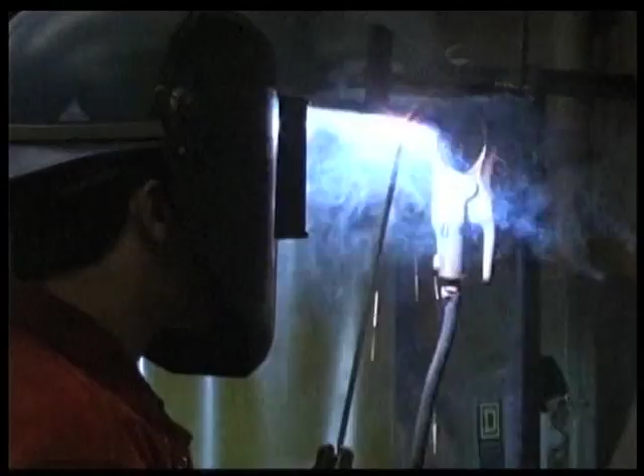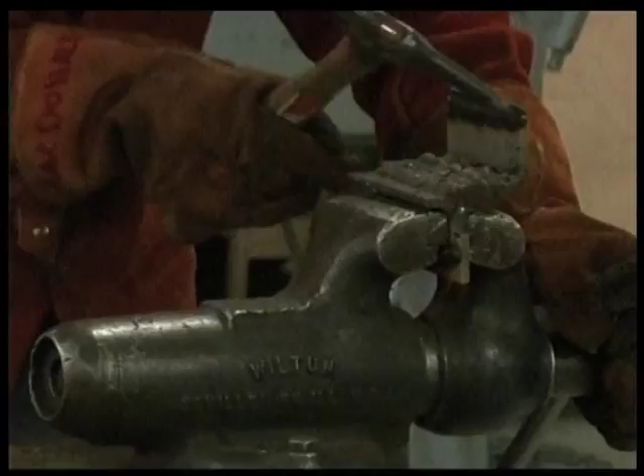Kevin Bell has been teaching industrial education for the past 22 years, but it wasn't until recently that he became a certified welder at NMU, allowing him to teach a vocational education class in the same discipline. Negaunee has always had a really good industrial arts program, and the tradition that we've had here, we're trying to keep that going. Bell is a Negaunee grad himself and was inspired by his predecessor's ability to immerse students in the topic by handing over the reins, something he strives to emulate in every lesson plan.

Not very often will I lecture very long. It's more hands-on, where they go from the classroom into the lab setting and actually do what we've talked about. This rod's called 6011, and the 60 in it holds 60,000 pounds per square inch.

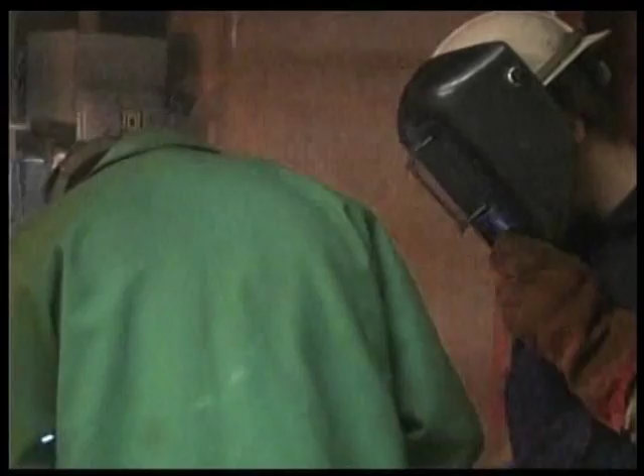Students end up doing a lot, which keeps them hungry for more. Being able to do something with your hands and being able to work with different tools, and not just having to read out of a book and take notes, it's nice to be able to do different things like that. Like working in conjunction with the school's leadership program to visit jobs in the real world.

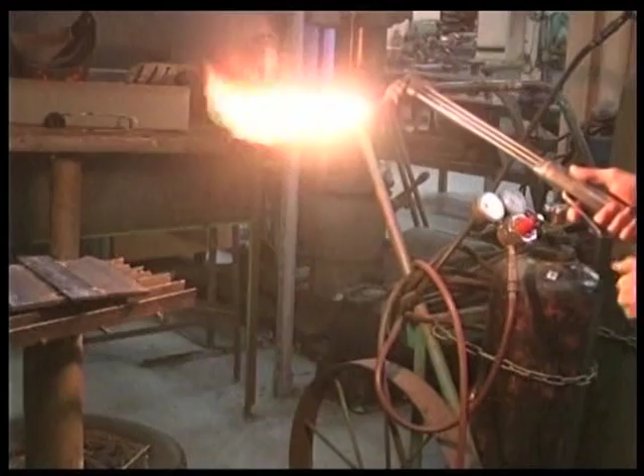People are telling us what they do on a daily basis and what interests people have in the community, and how we can continue to help people in different ways.

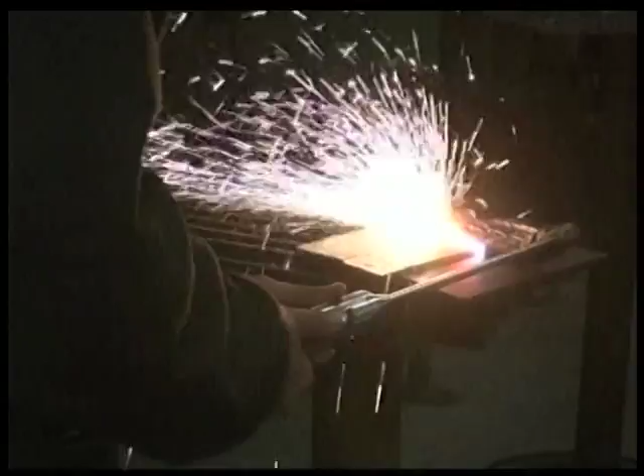One venture that incorporated their welding ability was the Grind Rail project for this past winter's downtown rail jam. They gave us the metal for it, and we designed the angles and cut the angles and welded it together, and it was nice to see that our work paid off and helped other people to have a fun time.

The welding program fosters those types of creative yet practical endeavors. We promote that. Like if a kid has something on his truck, like a bumper or something that he wants to get repaired, those are the hands-on things that will let them do that.

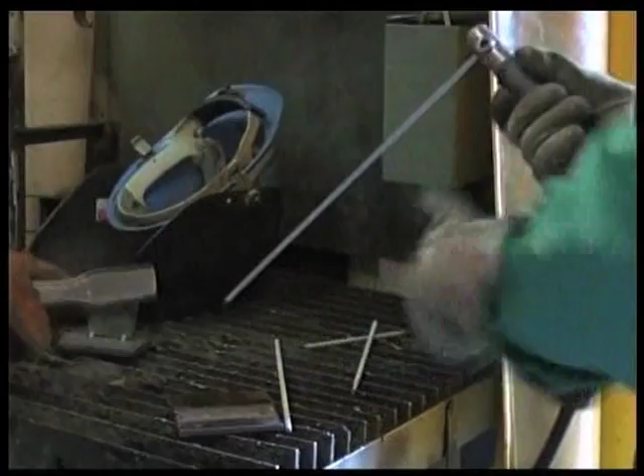Those little lines in there that make it look like you have a row of dimes, yeah, that's what you want. In between those proactive projects, Bell implements welding coupons that hone students' ability to bring designs to life through a guided lesson plan.

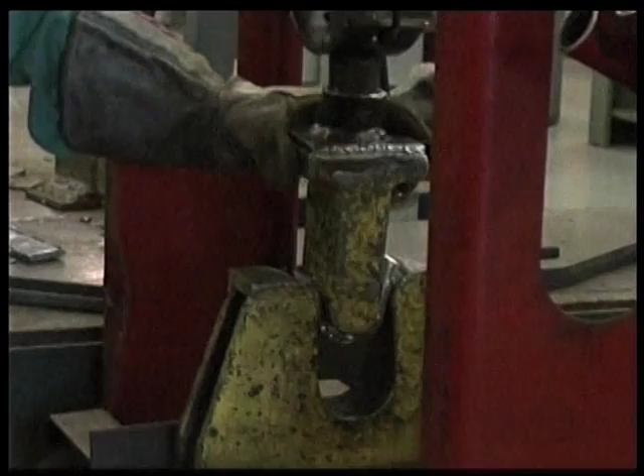He'll give us a sheet of a drawing to make, and we go ahead on our computer-aided drafting program, and we draw it up, and then we can take the part down here and make it in the metal shop, and then you actually have a part in hand. So it's pretty cool to see it actually all come together.

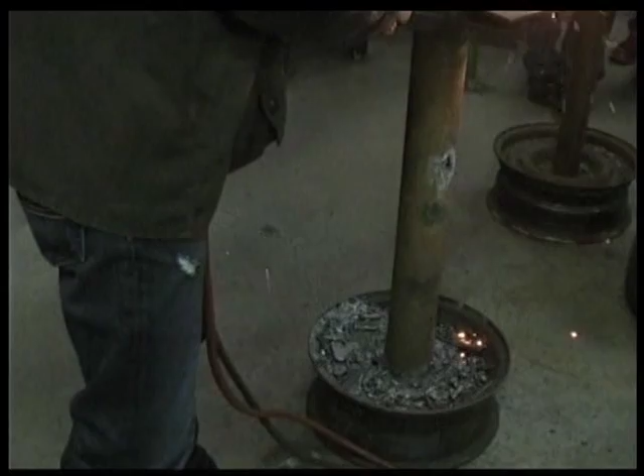There's a few that really that's their career. They want to be welders, but a lot of them will use it as a tool to get into something else. Most importantly, it gives students the chance to see the connection between the classroom and the work they've poured themselves into.

When you're working in a book, you get an A on your paper or a sticker on your paper. It's nice to be able to use something that you've made and see that people appreciate what you've made. That appreciation goes far beyond the classroom.

In part 2 of our look at vocational education, we'll explore the CAD program and how it's garnered Negaunee national attention. Reporting for ABC 10 and CW5, I'm Rick Tarsitano.

On a financial note that really hits close to home, as the nation's student loan debt climbs higher and closer to the $1 trillion mark, parents are beginning to wonder what the true value of a college diploma is worth. ABC 10's Rick Tarsitano delves into that issue with a look at a vocational education program right here in the UP that is starting to turn some heads.

Yeah, that one's going to go on the edge.

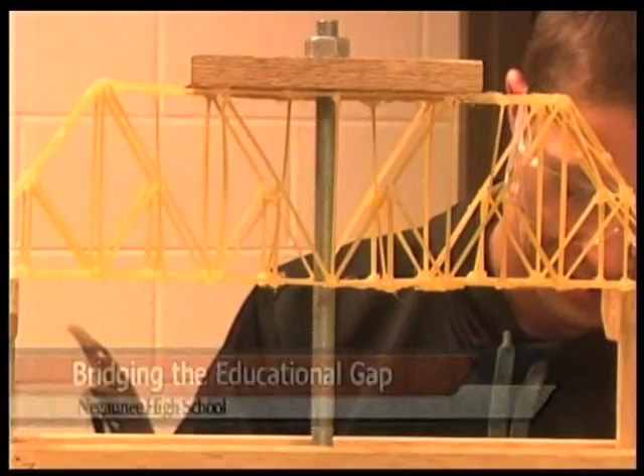While it may have looked like something you'd make in art class, this spaghetti bridge held more than 70 times its weight - that's just over 7 pounds. I know, that's pretty good.

The computer-aided design, or CAD program, houses 60 students ranging from freshmen to seniors, most of which are vying for their vocational education certification. They start out with the basics, learning board drafting and navigating the CAD system.

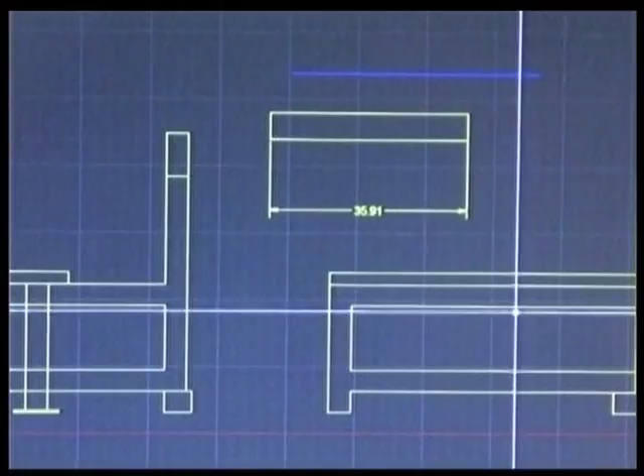The motor, and then there's a motor holder. Sophomore year, we get to do battle bots. That was one of the coolest things ever. That's when we start with Inventor, which is a lot more 3D modeling and working with mechanical parts.

And they're beyond proficient in that platform. It took one student mere minutes to design my camera with nothing to go off of except the naked eye.

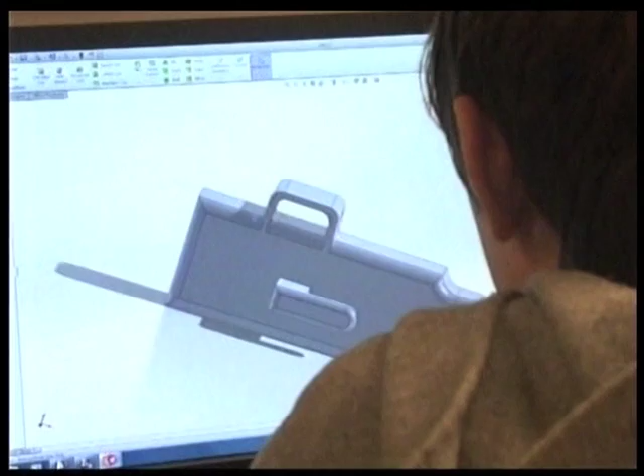By the time junior year rolls around, they take a bit more of a pragmatic approach, designing load-bearing bridges made of pasta before making the leap to wooden replicas. There's a lot to learn.

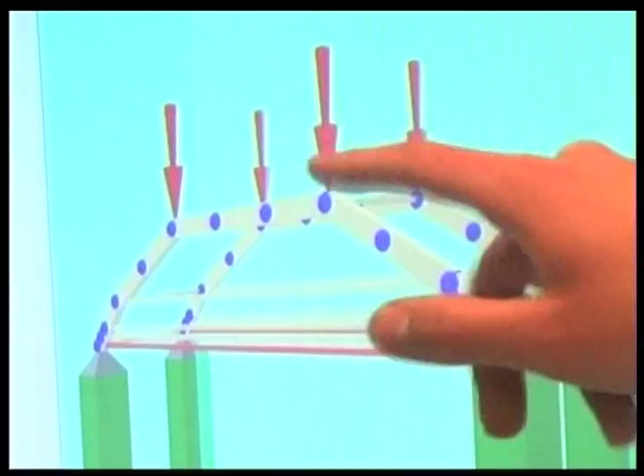We're using a program called the West Point Bridge Designer. You can go ahead and make your design right on the computer and test the load and see if it holds, and it shows where all your compression and tensile strength members are and everything, and it's pretty sweet to see.

Then it's time for the big show, where students construct big bridges that can hold a ton - well, almost half a ton to be exact. I think this is a 700-pound one right here.

Oh my gosh. I've watched people build the bridges since I was a freshman, and I'm really excited to get to build my own and see how it works, and hopefully we do as well as people have in the past. Those are some big shoes to fill.

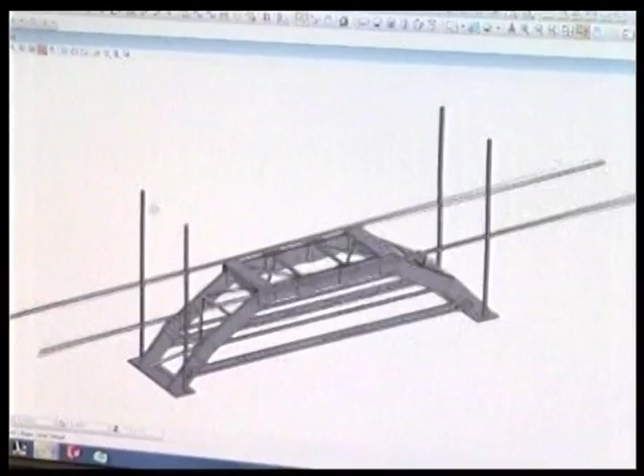This year, 2 squads comprised of 6 seniors took on 66 teams from 38 states at the national competition in Rhode Island. But they were their own fiercest competition, taking home first and second place honors.

Not only did they have to engineer and design a bridge, they also had to come up with a PowerPoint presentation and a 35-page written proposal to get into it. So that involves a lot of our other classes, in English, in math, especially geometry, drawing the angles for different parts and everything. It ties hand in hand with this kind of stuff.

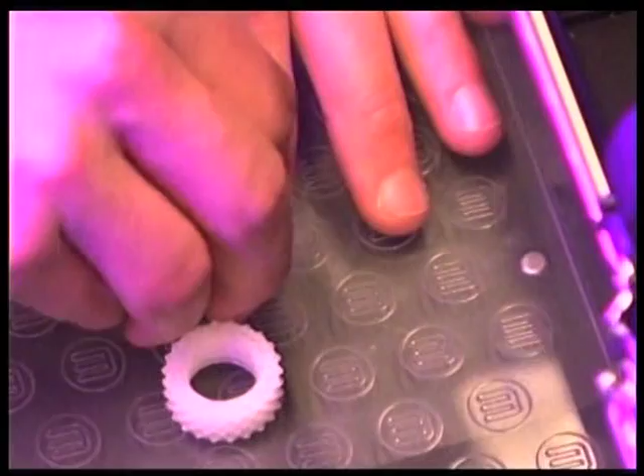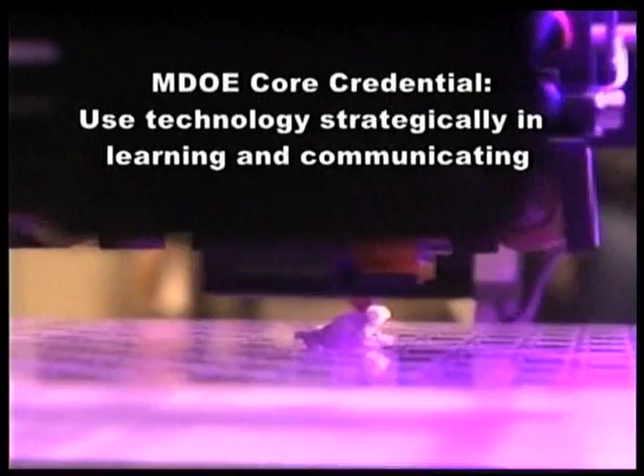That's the Voc Ed program at its core, embodying the essence of the Michigan Department of Education's 4 career and college-ready standards. Over here now we have a 3D printer where we can actually print some of these things out and see where they'll be used. It's not just theoretical things, it's real world stuff that you get to work with.

At the competition, we got to talk to a bunch of different DOT officials, Department of Transportation officials, and got to talk about the bridge and got to hear some of their feedback on what we were doing - all positive feedback.

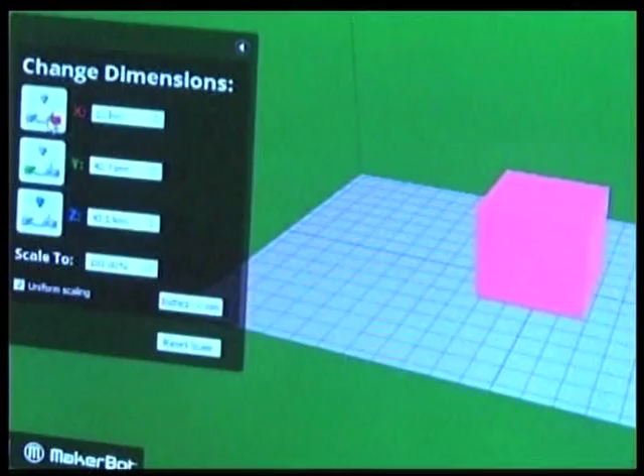After this year, 8 welding and 6 CAD students will be certified and on their way to a career in a similar field. It's crucial that these types of programs get the financial support they need to give the future workforce a glimpse of a brighter tomorrow. Reporting for ABC 10 and CW5, I'm Rick Tarsitano.